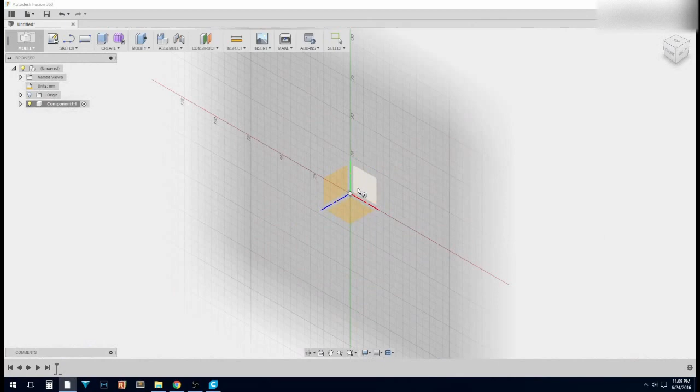Alright, so over here at the computer, if we open up Fusion 360, we're greeted with this screen, and this is a very simple design. Over here, we're going to go new component. At this point I'd save, but I already have this project somewhere else. So I'm going to hit C to sketch a circle. I'm going to sketch it on this plane.

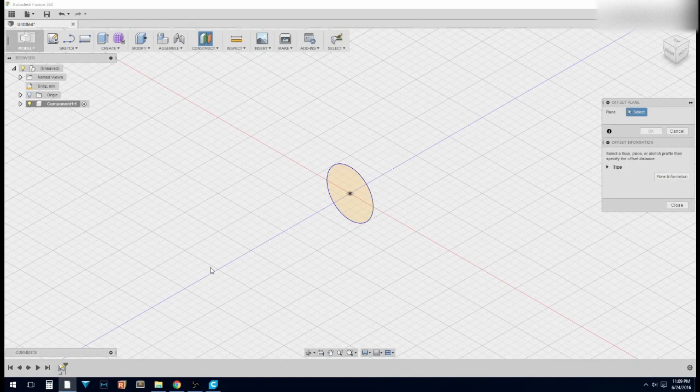I've got my measurements here. I'm going to do 35 for this one. 35. Now I'm going to go up to construct, and I'm going to construct an offset plane. Now this is 43.8 millimeters in total length when I'm done. So I'm going to move this 43.8 divided by 2. And that's going to be my center point.

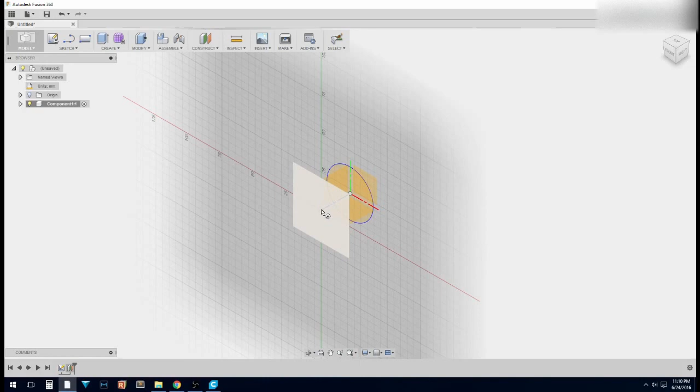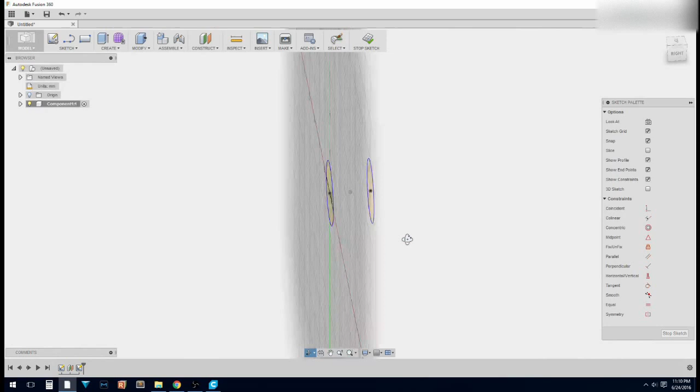And I'm going to sketch another circle on this plane from the center. And this one's going to be 35.4. 35.4. Lock that in. We look at the side, we've got 2 circles. They're lined up. And we're going to do that once more.

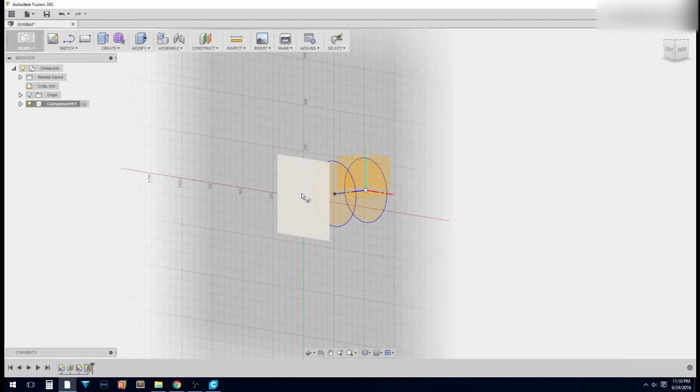One more offset plane. Offset from this. And again, 43.8 divided by 2. Enter. Sketch another circle. That is C for circle again. Again on that center point. Again, 35 millimeters.

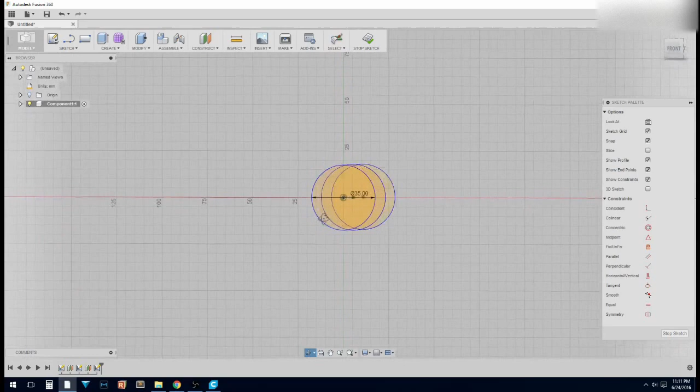Now here's where things get interesting. So we've got 3 circles, and the length from this circle to this circle is the width I want the wheel. I want it to have the very slightest bow along the edge, I guess, the side, the round part.

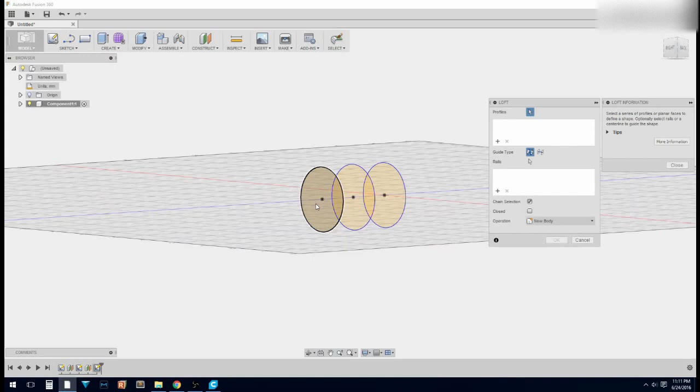So to make this a solid, I'm going to go into Create and Loft. I'm going to select the first one, then the second one, then the third one. Everything here is okay as default, and I'm going to hit OK. Now we have our cylinder with the very slight bow along this face.

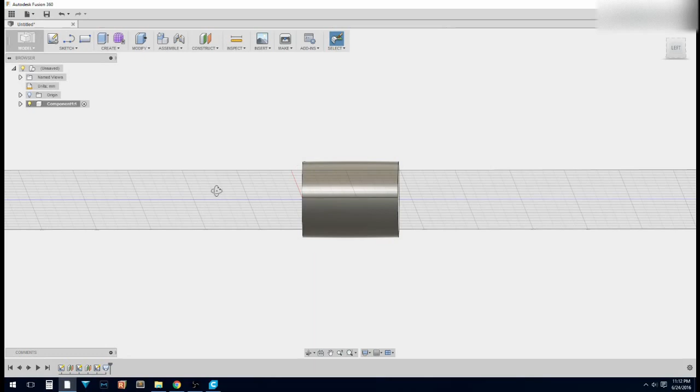I'm going to hit C for circle again, and I'm going to sketch on the side from the center. Now there's an 8mm shaft that goes through this, so I'm going to go 8.15. Gotta move your mouse until you see the measurement there. 8.15. Actually, this is being printed in ABS. Let's go 8.25, just to factor in for shrinkage.

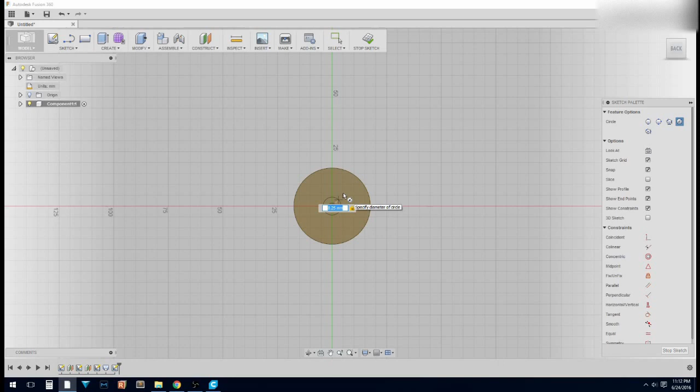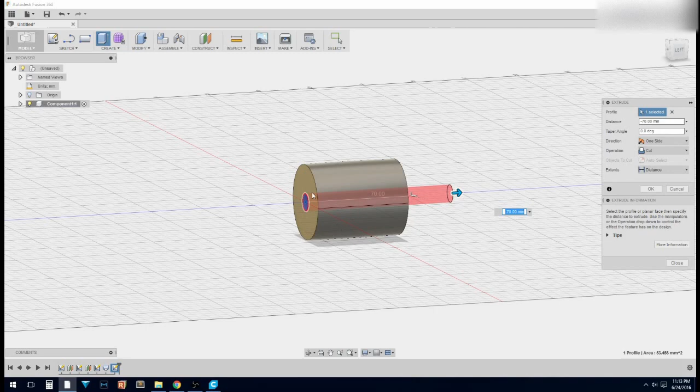And that's good. Now I'm gonna select that. I'm gonna go up to modify, and I'm gonna press pull. Now if we turn to the side, we see that arrow. I'm gonna grab that and pull it backwards all the way through. Make sure over here it's cut. You can tell it's cut because it's turned red. And we're gonna hit OK.

And there's our part. We are done. This kind of looks a little odd because it's an orthographic. If we go to perspective, you can get a better idea.

But that's it, very simple. That's 5 minutes and 16 seconds at this point. That's with explanations and everything. So, very quick, very simple.

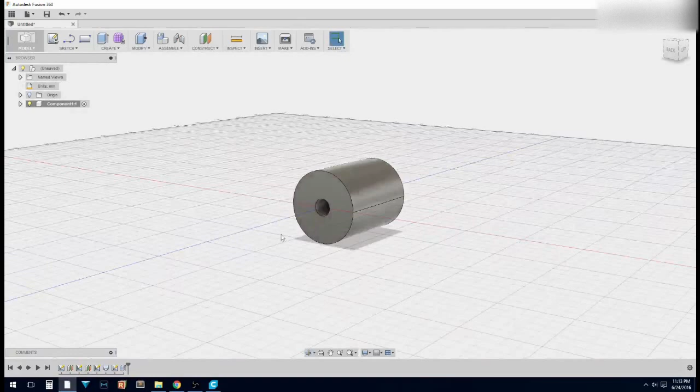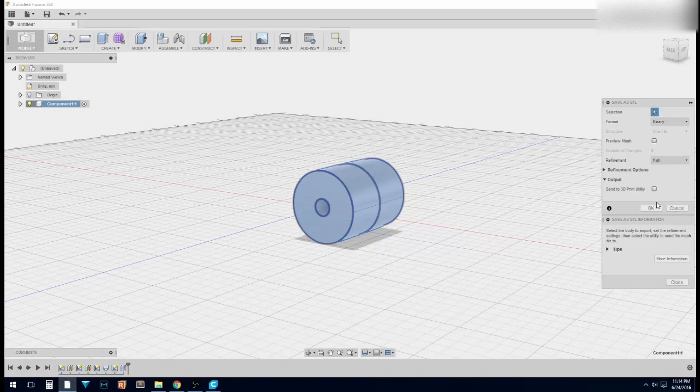Now, if you go over here and save as STL, binary format, high refinement. It's defaulted to medium, if I remember correctly. I just set it to high so that I get all the details of this piece. So save your STL. And we'll open up Cura.

So here in Cura, we're going to open file. On my desktop here, we have the freezer wheel STL. And you see how in Fusion we did the model on that side plane. This is so that we don't have to rotate it in Cura. It's just a little trick I've found. So there's our freezer wheel. We're gonna print this in ABS.

So this is the new Cura. This is Cura 2.1, I think. Don't quote me on that. It's Cura 2 anyway. So I'm gonna go. Also, diameter is correct. Quality is good. Scale is fine. Infill 40%. Printing temperature 245. Bed temperature 95. 3.5 is my retraction. That's just what I found works with the Wanhao I have.

So for speeds, I'm actually going to be printing a lot slower than this. I just adjust my speeds on the printer usually. So when I send this to the printer and load it up from the SD card, I'll likely print at 40% of the speed. So, probably something around 20 millimeters a second, just to make sure the ABS adheres really well, as I'm printing on a Wanhao, so I don't have an enclosure, which brings us to experimental.

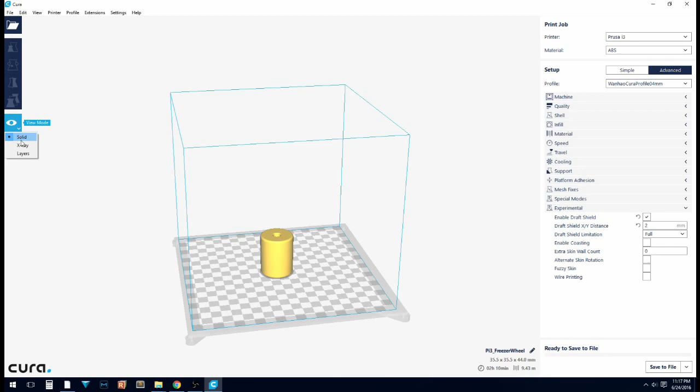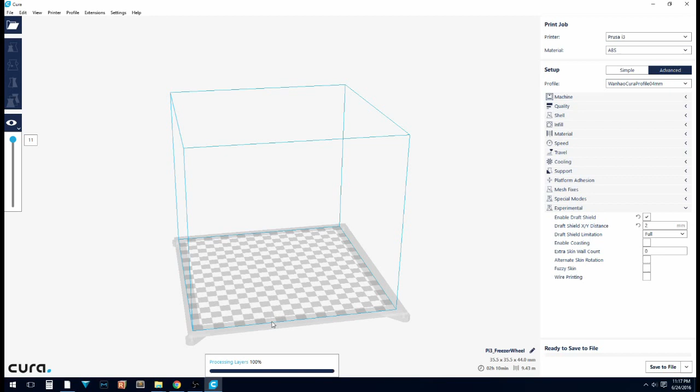Under experimental here, we're going to check off enable draft shield. I've set mine 2 millimeters away. What this does is if we view the layers, which will take a few seconds, it's got to process that. If you know what an ooze shield is, it's essentially the same thing but for a different purpose. It's going to build a 1 layer thick wall around the print, which will help trap heat around the item and stop your ABS prints from warping and peeling and splitting and whatnot.

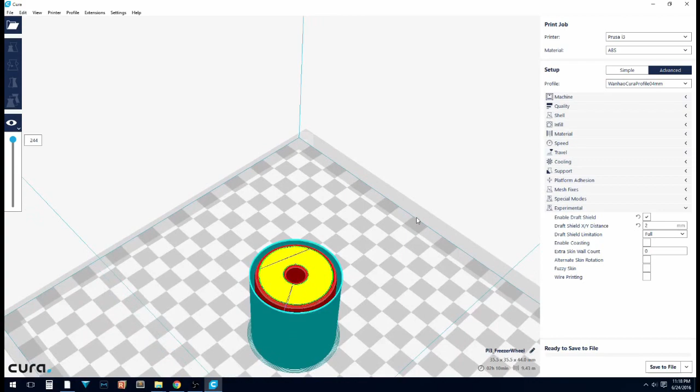So you see here, our wheel is this red and yellow part. The draft shield is this teal part. That just helps me not have to have a cardboard box on my printer. So we're going to enable that. I did it at 2mm, and the limitation just means how far up the part it will print. I print all the way up the part, just to be sure.

So, under platform adhesion, I'm just doing a skirt. I'm not actually going to do a raft or anything. I just do the skirt to make sure everything's extruding well, make sure everything's level, as I do my final fine adjustments to bed leveling as it prints the skirt, just to make sure everything's even.

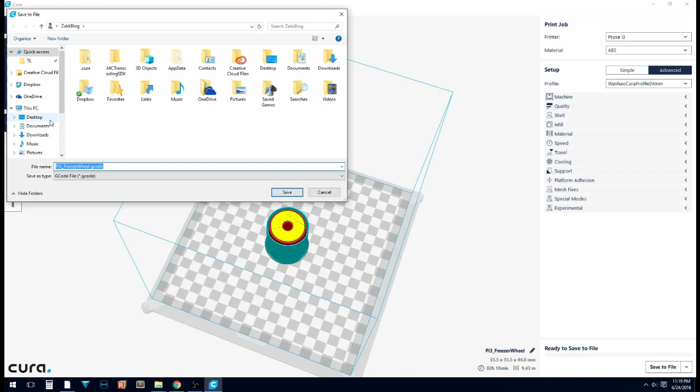So with that, we're going to save. I use save to file, and I would save it to my SD card, but my SD card's not in here. So save it to your SD card, send it off to the printer, and that's it. So let's check out this time lapse.

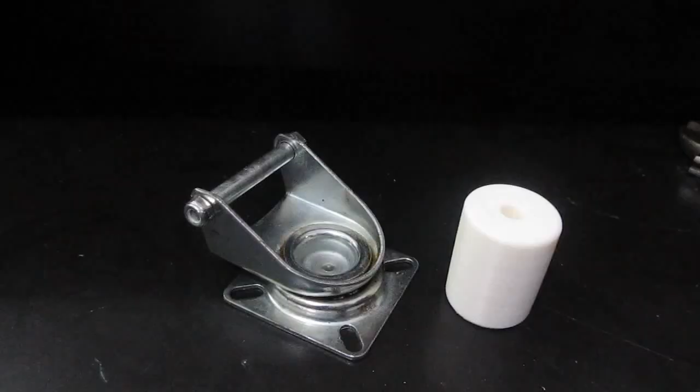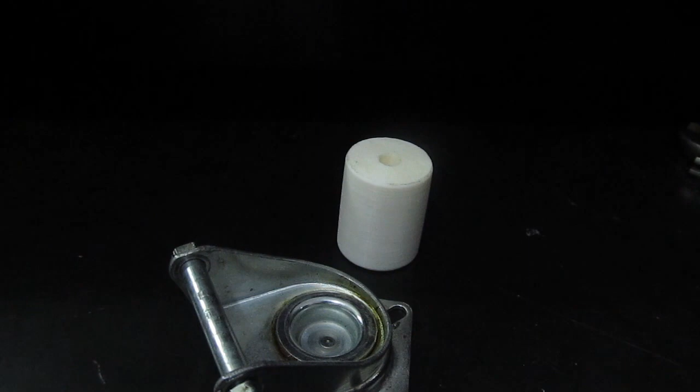Okay, so there's the part. It's printed in ABS. As you saw, the new Cura does that draft shield. That's pretty cool. Means I don't have to have my printer sitting in a cardboard box like I did for a little while there. As you can see, that flat surface I was talking about is virtually non-existent, but it gives it just that slight amount of, I don't know, it's forgiving. It doesn't have to be perfectly 90 degrees to the floor.

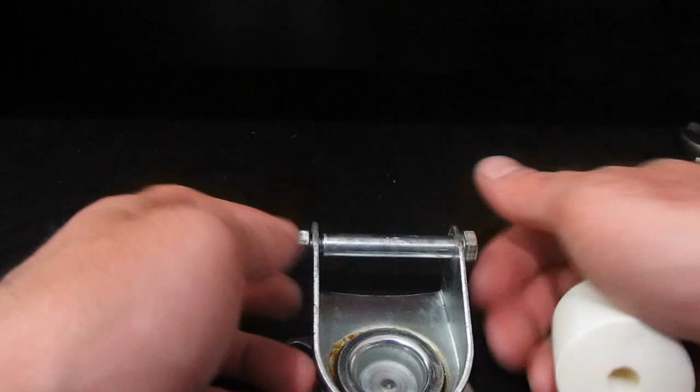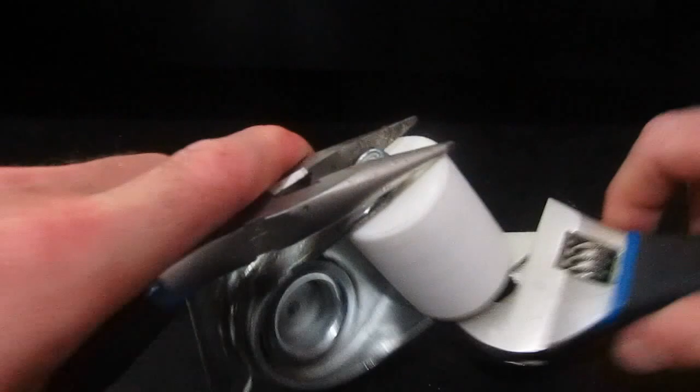So let's go ahead and install this. It's very simple. You put the wheel in, put the axle through. It's simple. Screw it on the other side. Tighten it up. Just like that. So this will mount to the bottom of the freezer like that. And it rolls nicely.

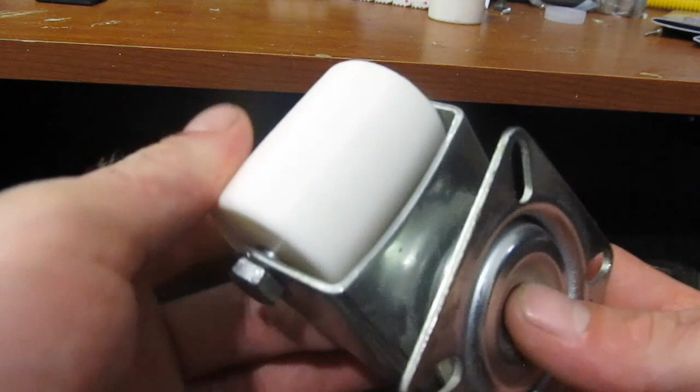I like it. Let's hope they do. Actually, I've already shown him. He likes it.

Alright guys, so that's been another quick look at practical uses for 3D printing.